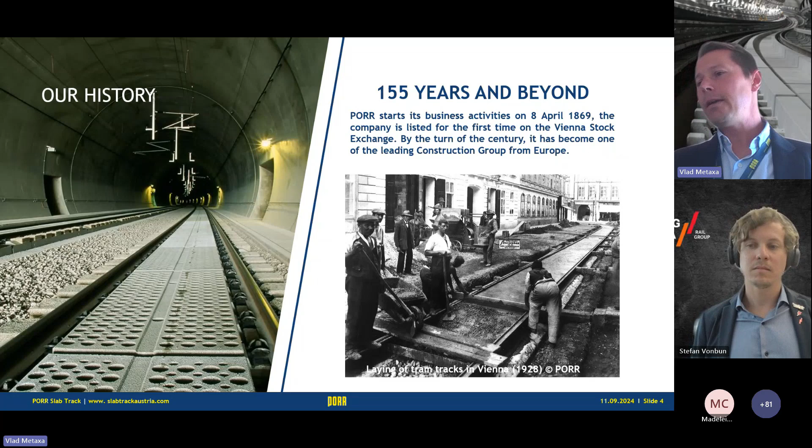So why are we talking about railway expertise at Porr? It represents one of the core competencies in Porr. We have extensive experience in execution on demanding domestic and international projects. We delivered, up to date, high-speed railway tracks, mixed traffic, freight, metros, and trams. So practically we covered all the different types of tracks. We have over 1,000 kilometers of slab track delivered and installed in Europe, Asia, and Australia with our technology.

Of course, we are trying to promote this, but sometimes other projects have different requirements, and therefore we try to go along with that. We did install railway on bridges, earthworks, and in tunnels. So practically we face all the different challenges that railway can give to the contractors, to the clients, to employers, and so on - all the stakeholders involved in this.

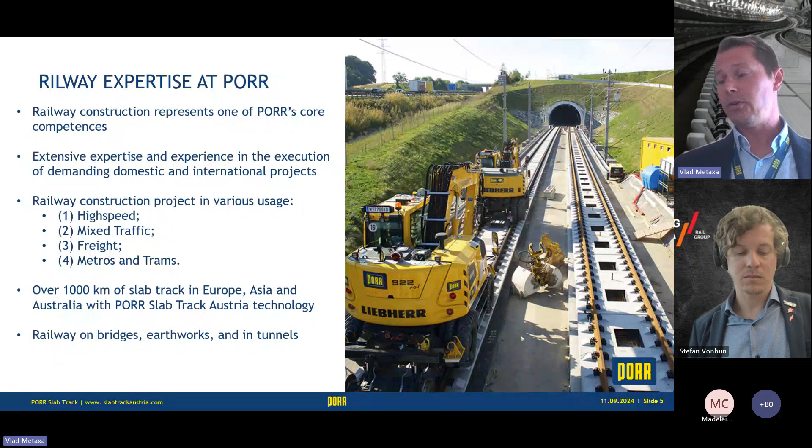As for type of railway tracks, I just want to touch briefly on this aspect. Because normally in ballasted track, the ballast substructure is an elastic environment. Practically it's taking a lot of the dynamics of the trains and dissipating it to the sub-base layers. And the fastening system is more or less not as much stressed under this type of loads. While in the ballastless track system, the structure has less elasticity, and therefore the fastening system is more, let's say, exposed. However, this along the years and along the technology development proved that the ballastless track systems are much more durable and much more reliable during operation times. So this is one of the most important aspects that needs to be mentioned here.

In terms of type of slab track, there are different systems on the market. So the specifications are always more or less done openly for all the different types of systems to be implemented. Here I will touch on the main categories that, of course, we are facing and installing. There are the compact systems, which are the monolith systems, cast in situ sleeper, which is the most, let's say, known - the Rheda 2000 system.

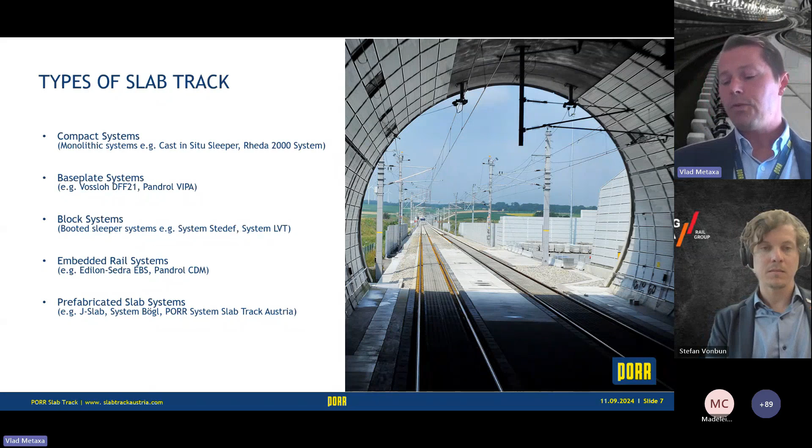I will focus now the discussion on when it's required or suitable to apply the slab track system. Usually, the projects that require mostly this type of track... of course, there are authorities and networks operating high-speed trains on ballasted track. I'm not saying it doesn't exist, but the slab track technology proved over the years that it's much more suitable for this kind of operation.

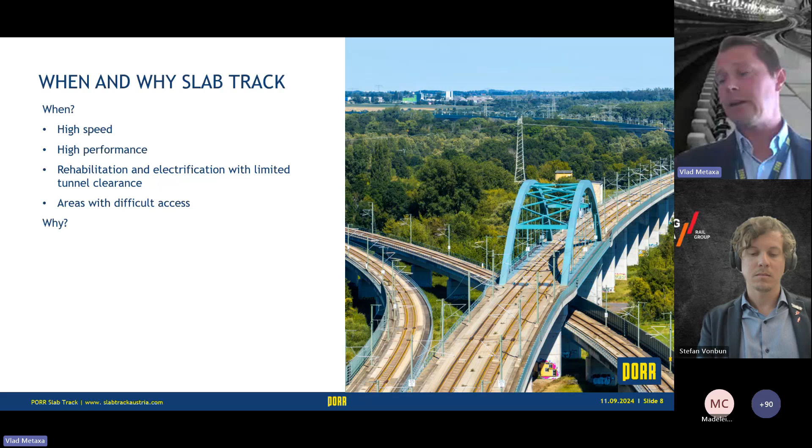Operational tracks for high speed, due to the high performance requirements and high accuracy required. We also faced projects where rehabilitation and electrification with limited tunnel clearance were required, and therefore slab track technology was the most suitable type of track to install in such areas. And of course, more and more we are facing projects with difficult access areas, so these slab track technologies are the most appropriate to be executed.

Why install slab track? Because the maintenance is reduced, so the requirements for maintenance don't affect the revenue times. Of course, different systems present different challenges, but certain systems have additional benefits: long life cycle, high availability of the track and revenue times, high track precision, which has secondary effects like reduction of noise and vibration emission of the track, and lower effects on the wheels of the trains, and so on.

And more, we face the requirements for trafficability with emergency equipment in areas with difficult access like bridges and tunnels. So this is a major advantage that slab track has compared especially with ballasted track.

Talking about projects and how we implemented this technology in current or delivered projects, one example is the high speed line in Germany, where we delivered the VDE 8 project for operational speed of 300 kilometers per hour.

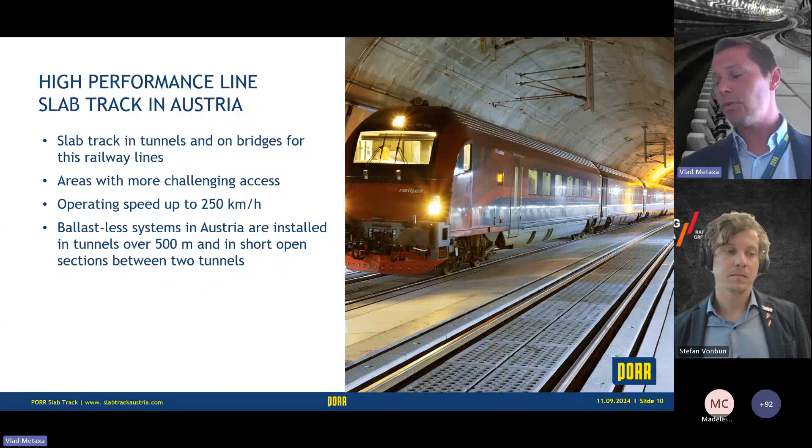So if you have two tunnels one beside the other, instead of doing transitions that add a weak point in the track, which can present maintenance requirements during operation, it's decided to go throughout with the ballastless system. Another example of a delivered project with a ballastless system is the King's Cross gasworks tunnel in London.

This tunnel was decommissioned in the 1970s, and it was identified as a possible way to add capacity to King's Cross. Therefore, the ballastless system chosen for this location was the Porr slab track system, which had integrated resilient material in order to also mitigate the noise and vibration emission from the track.

And by reducing the thickness of the track and the width, they could install two tracks and also the overhead line above. So this is another example of how slab track technology can cope in these difficult areas with difficult access.

Another example, and I like this cross-section to show the comparison between ballasted track on the left and slab track on the right, is the Arlberg tunnel. This is a practice in Austria because the structure gauge, by inserting the catenary line, had to be increased and the thickness of the track reduced.

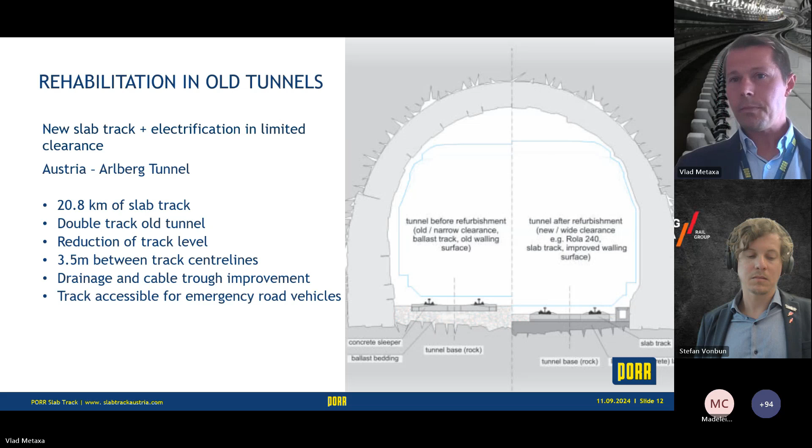Another project that we delivered was a greenfield project. This is another application, of course the ideal case. Metro Doha was one of the largest metro projects that we executed. Here we had 165 kilometers of underground, elevated, and at-grade track. And again, the technology of slab track proved that we could deliver such a large-scale project within 3 years, compared to a ballasted system, for example, where it would have been impossible to do that. So this was proving again that slab track technology is much more suitable for this kind of application.

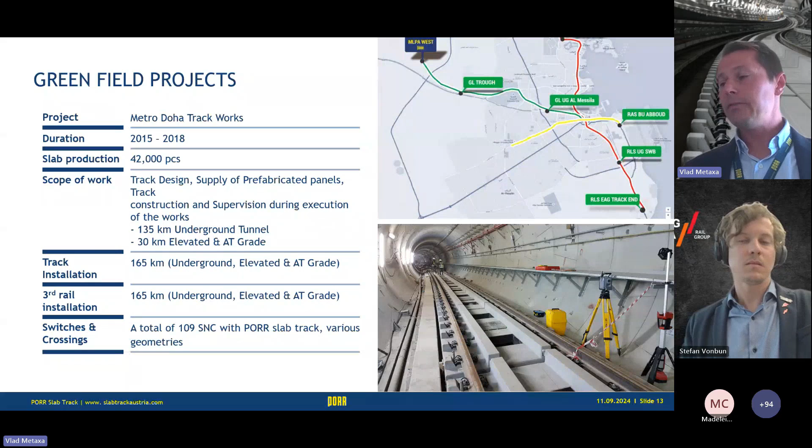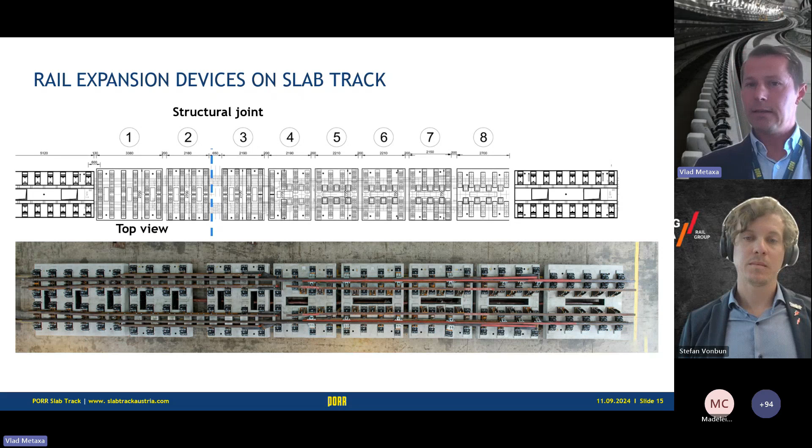What is important for this kind of areas is the accuracy, because working in ballastless track in concrete, the accuracy of the track is very high, and therefore the human error or installation errors on site are much reduced, and in this way you can obtain a good track quality. The same applies for rail expansion devices on slab track that are necessary for bridges, where we have expansion joints with large movements during temperature changes. With the experience we got along the projects delivered, we now definitely look always to go with ballastless solutions for these areas, since they are much more stable and present less headaches during operation and maintenance.

The design consideration for optimal approach, longevity and cost effectiveness - what we usually face is that the procurement schedule and the impact of design integration are faced by the contractors. Usually the design starts bottom up, or the procurement, which is normal - you need a structure underneath to be able to build a track. However, if you don't have the design of the track to be implemented, this can represent an interface issue during design and construction. So we always encourage the authorities and employers to consider engaging the track designer early in the process, in order to avoid all the interfacing issues that you can face during construction.

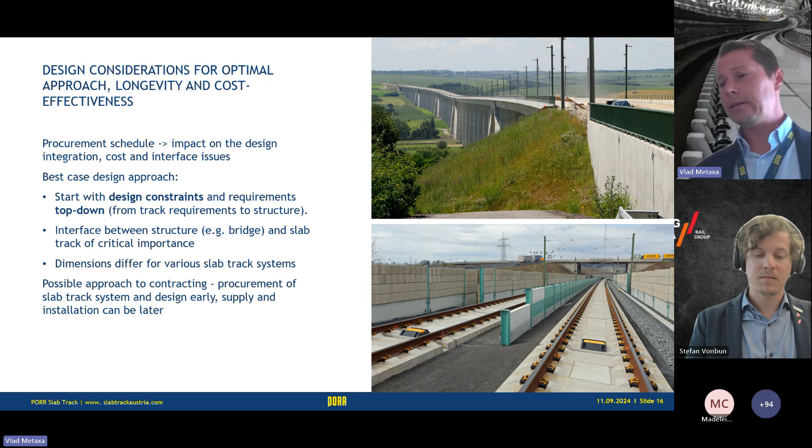What happens if you engage the designer? You will be able to have a cost-effective solution because you can optimize the bridges, you can optimize the tunnels, and so on. You will have a long life cycle if you consider properly the track-structure interaction, and you will have an optimized solution for the respective line. And of course, you mitigate all the project execution risks by doing this.

Of course, you can have a holistic approach if you do that, and you can reduce the dead load of the track formation. You have cost saving in the bridge structure design, and you can have reduced quantities for the track especially, that practically are just generating costs due to longer installation times and higher quantities that need to be installed. The advantages for tunnels are cost savings in the tunnel section, considering the reduced thickness of the track. So ballastless requires less space provision, and reduced concrete quantities.

This doesn't really impact the contractors, but what brings a benefit to the employers, the authorities, is that you can get more clearance in the tunnel for installation of all different types of equipment that are required to be installed.

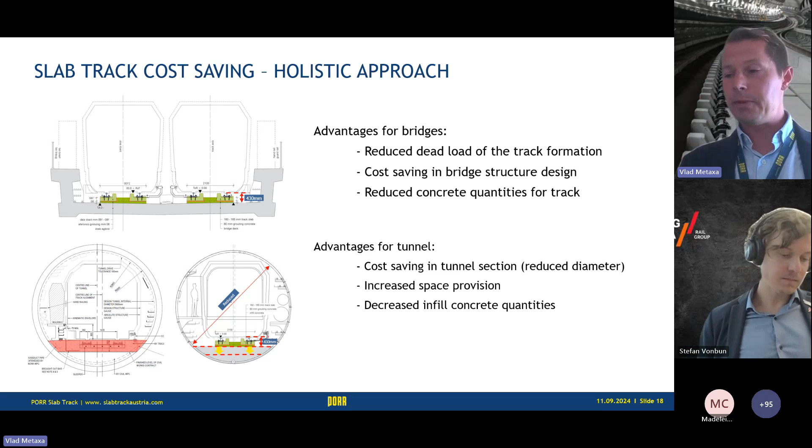The slab track operation and maintenance, along the years, has definitely proven to be much more reliable. The availability of the track is higher. The track precision over lifetime is maintained. So practically, having a concrete structure, you don't require so much maintenance activity to do, therefore the costs for maintenance are reduced, and the overall lifetime generates a reduced cost for the design life period.

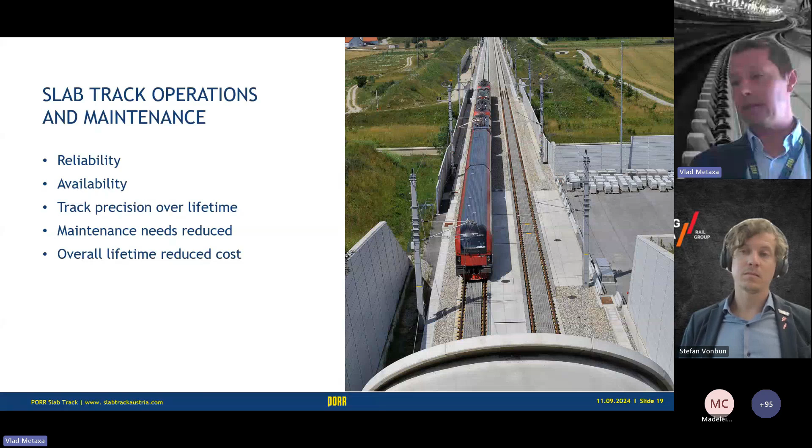Here we have a track alignment quality check - on the left side you have the ballasted track, and on the right side you have the slab track, and you can see the quality of the track is completely different. This is done after several years of operation, and the readings are, for the ballasted track, preventative - they will need to do some tamping activities in order to realign the track. However, for the slab track it's not required, and operation can continue as is. Of course, visual inspections and now videos or other technologies are required just to be sure that everything is fine.

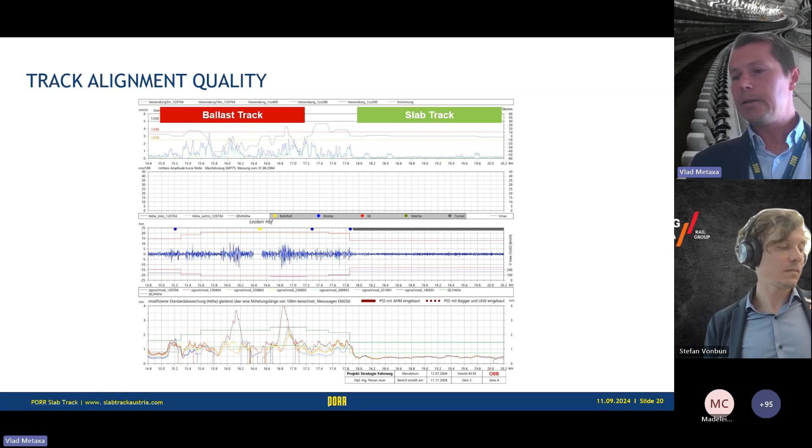But in principle, there should not be any risk on that. The cost between ballast and ballastless, we did several assumptions and exercises for different clients. The break-even is usually somewhere between 15 to 20 years between the investment cost of the ballast and the investment cost of the ballastless. And of course, depending on the type of ballastless system, you then have additional advantages, but I will not go into that detail at the moment.

However, what I want to say is it's always difficult to beat the ballast price per linear meter during construction. However, if somebody is looking at long-term investment, definitely the ballastless system will always be much more reliable and much cheaper compared to a ballasted system. Not talking about environmental impacts nowadays and the heavy equipment required to maintain the ballast track.

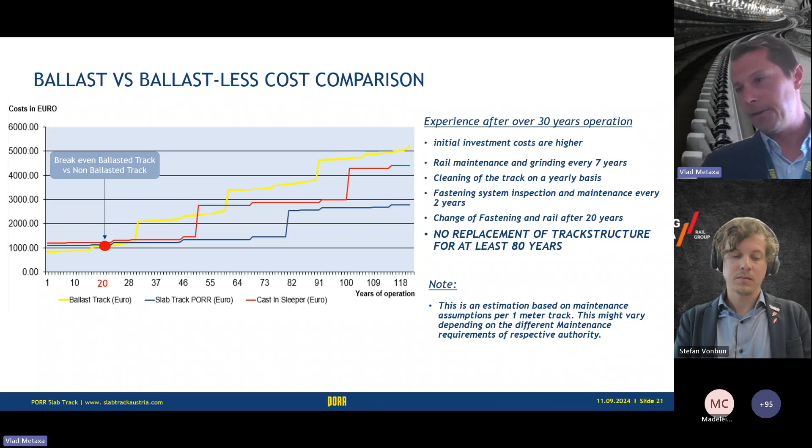As a summary of the slab track, it's a long-lasting, effective investment. For clients, I think this should be a prime consideration in their assumptions. For large networks, the track is more or less a system-wide solution. So therefore, I think it should be good for the authority to always consider the track as a whole package, a standalone package, with the engagement of design happening earlier together with the civil contractors in order to save and have lower life cycle costs. And of course, overall, high availability of the track with no impact on revenue hours.

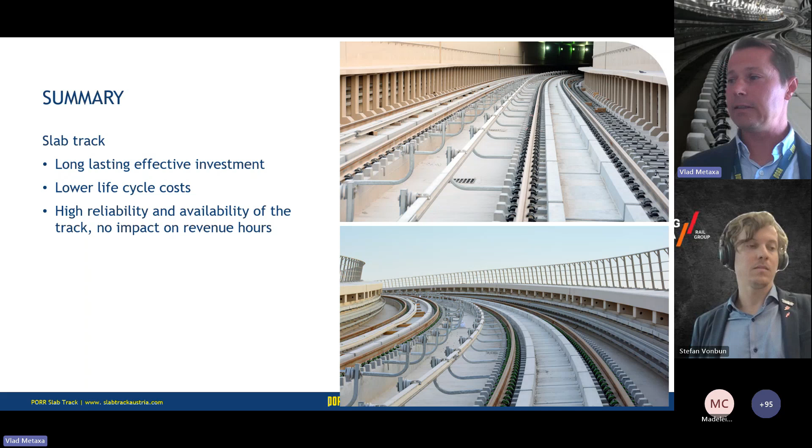This is, I think, a clear message that the slab track generally provides to the authorities and to the operators. So thank you very much.

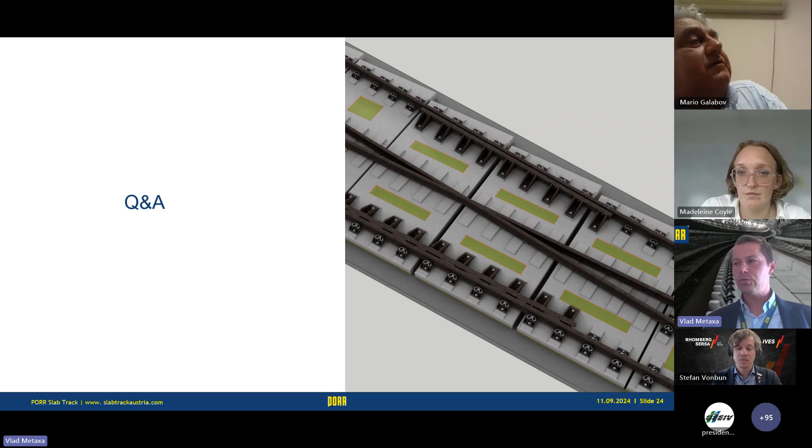Thank you. Yes, so to address transitions, in order to design a proper transition, you need to properly consider the operational speed of the train, the operational load, and especially I think also an important aspect is the fatigue at the transition. What we usually do is have the transition starting on the ballastless track, and then within the ballasted track, we'll have sleepers with different fastening systems of different thickness in order to have a smooth transition.

We also depend on the type of structure, because sometimes we have not only the difference in track type, but also different types of structures which add additional challenges to the transitions. In that case, you might need some extra rail or extra provisions for rigidity of the track between the two. However, as I said, in Austria, for example, the clear consideration for two tunnels in proximity is to go through ballastless track, otherwise you will have transitions. So we can treat that, and it is possible to have a solution that requires less maintenance, or doesn't require too much maintenance. Of course, for the ballasted area you need something, but for the slab track, it's not really required.

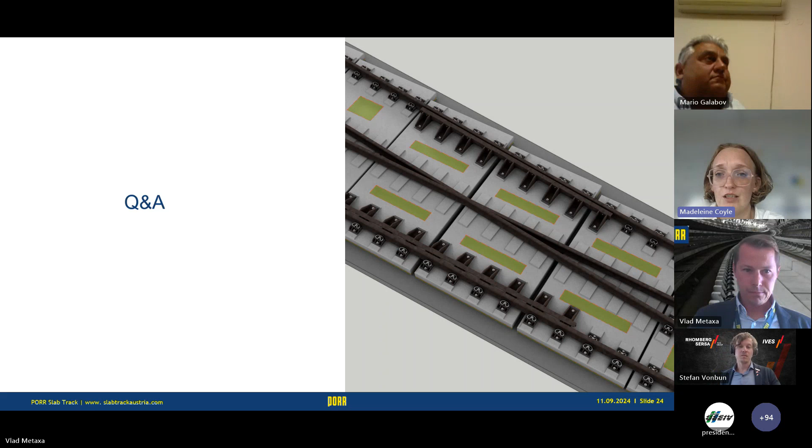Next question is whether any special aspects are covered in the design for a transition zone, which is tunnel approach as well as bridge approach, or bridge starting from tunnel approach. I think you may have just covered that in talking about the transition. Just to add on for bridges, we will definitely need to look at the structure behavior and study the track-structure interaction. So it's a little bit more complex, but it's doable. It's not a problem to do that.

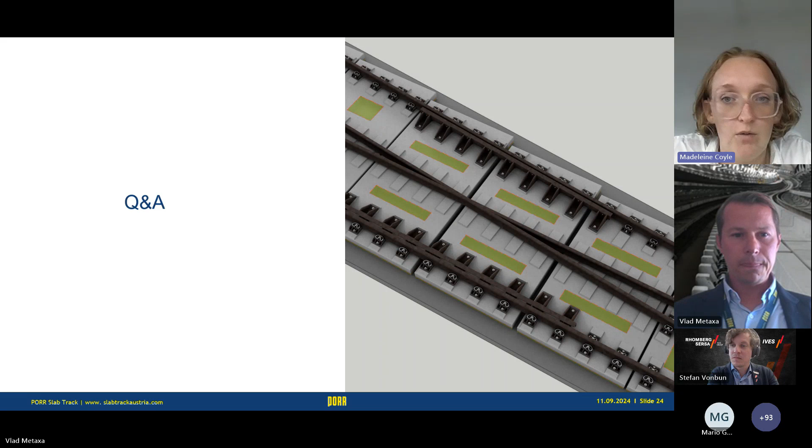Next one from Abigail Cahen: in the high-speed Germany case study photo, what is the function of the ballast next to the ballastless system? Not on the adjacent track, but alongside the concrete, is the question. Sorry, in the presentation, the picture I have.

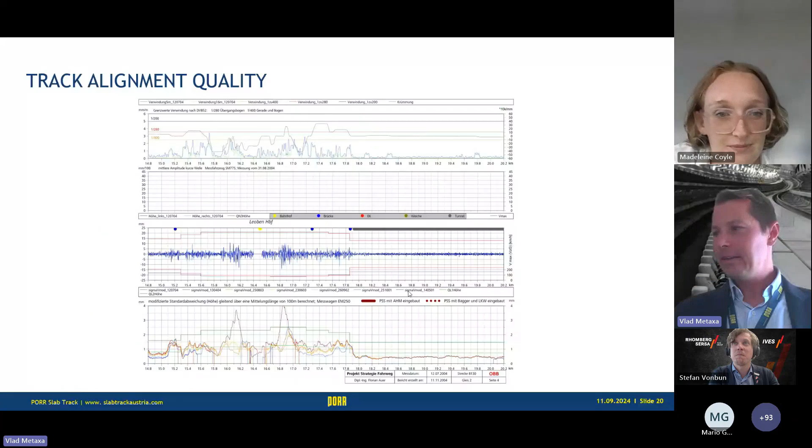Yeah, maybe it's worth bringing it up again. Okay, I'll put it back. The reason is that in this particular case, as you can see, the main line is ballastless track, but on the pocket tracks it's not needed. Usually you put maintenance equipment along the way, or there are safety requirements for such track, which is not practically operated full time. They are operated only in limited time, and besides this, they are operated with reduced speed - not 300 kilometers per hour. Therefore, the cost for such tracks to be ballastless is not really needed, because they can easily serve properly being ballasted tracks. So that's the choice of the authority in this case.

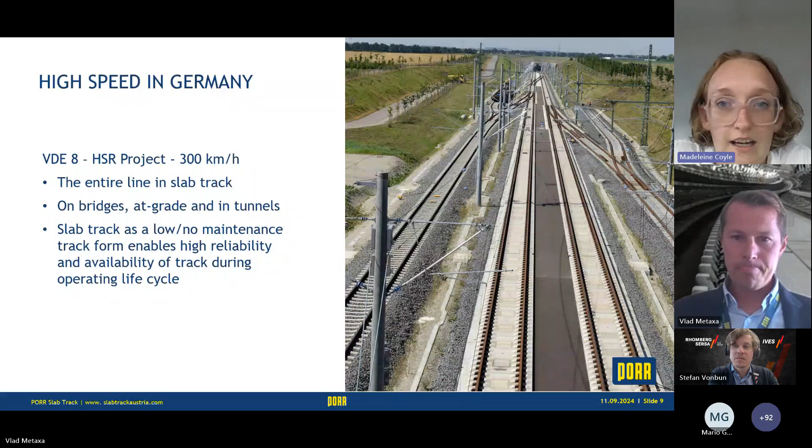I was specifically wondering, not on the adjacent track, but along that center track, there's still ballast along the sides of the track, and I'm wondering what the function of that is, or if it's just left over from before. It's in the area where we have freeze-thaw cycles, so this is set up as a freezing protection layer.

Abigail, does that answer your question? Oh yes, thank you. Cool, thank you.

Okay, are you good for more questions, Vlad? Sure, lots coming in. I don't know, Stefan, how good he is, but for me it's okay. Yeah Stefan, feel free to come in. It's okay, let's see - once the numbers start to drop in the participants, then we maybe should stop. No, it's fine, usually we have the other problem that nobody's asking. So yeah, this is great.

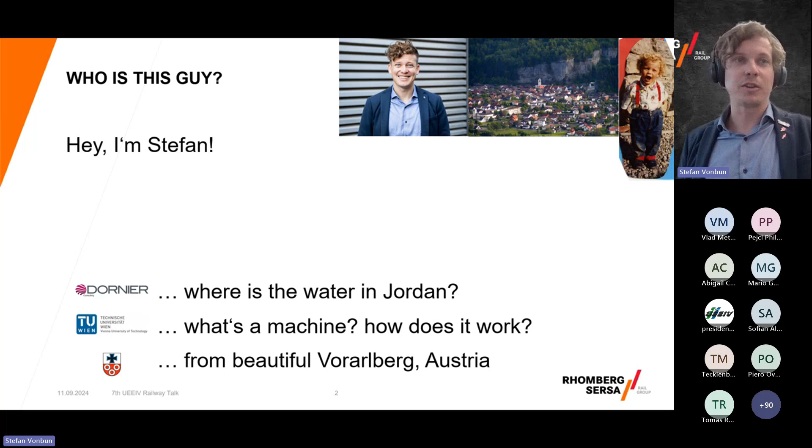So very quickly, I'm going to introduce myself. Who is this guy standing in front of you? I'm Stefan, from Western Austria. It's really beautiful here, we are located in the mountains. I have a technical background, I once learned how machines work. Then I was looking for water in the beautiful country of Jordan. For a while I stopped railway vibrations and developed some new business areas. And now I'm going full steam ahead with our slab track system IVES and our transition module VTRAS. So next year I will celebrate my 10-year anniversary in the railway infrastructure business.

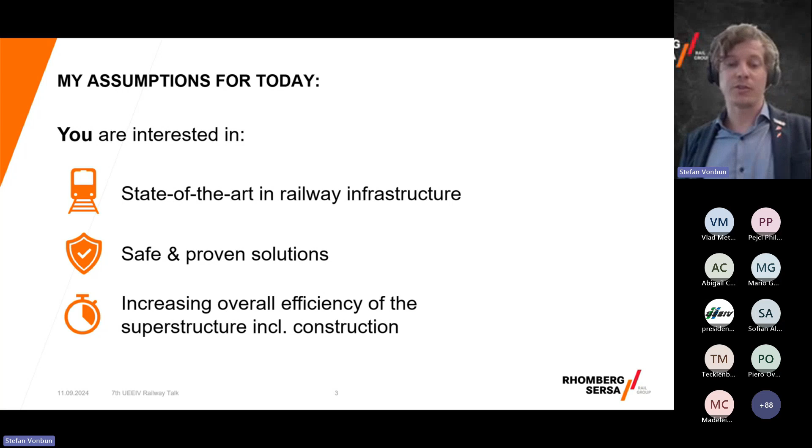Let's go ahead. I have a few assumptions why you people - we are now more than 100 participants - why you are here, what your interests are. I assume you are interested in state-of-the-art railway infrastructure, you are looking for safe and proven solutions, and you want to increase the overall efficiency of your superstructure, including the construction of the superstructure. Since I cannot see you nod, I'll just assume I have 3 positives here, and we can move on.

I'm here to give you a quick overview of what we do at Rhomberg Sersa, also to connect with people, so you know who to call in case you have issues that might be something we can solve for you. And of course, I think this is a really crucial part, and we just saw that - I'm here for exchanging knowledge and receiving some feedback.

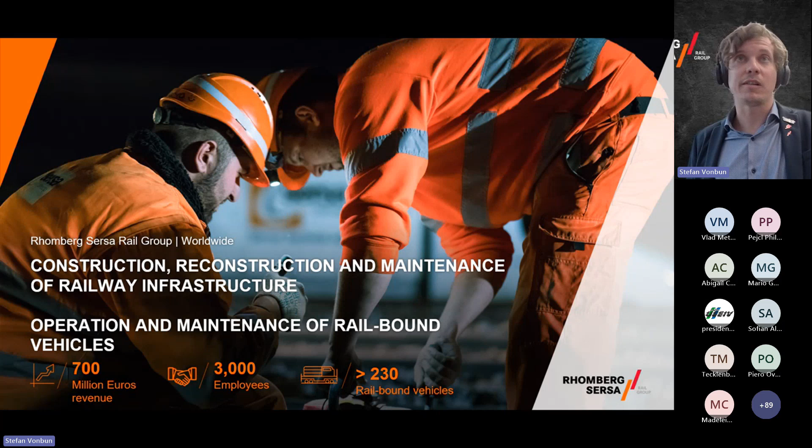So, 2 brief slides about Rhomberg Sersa. We are actually a Swiss/Austrian company. We have around 3,000 employees worldwide, and we work in construction, reconstruction, and maintenance of railway infrastructure. With some of the questions asked during the previous talk, we already have a lot of experience because we not only build our own system, we have built almost any slab track system that you can find.

Okay, now let's go for the actual topic of today. I'm going to talk about IVES, our slab track system, and how it can help to build faster and have some upgrade of tracks in short possessions.

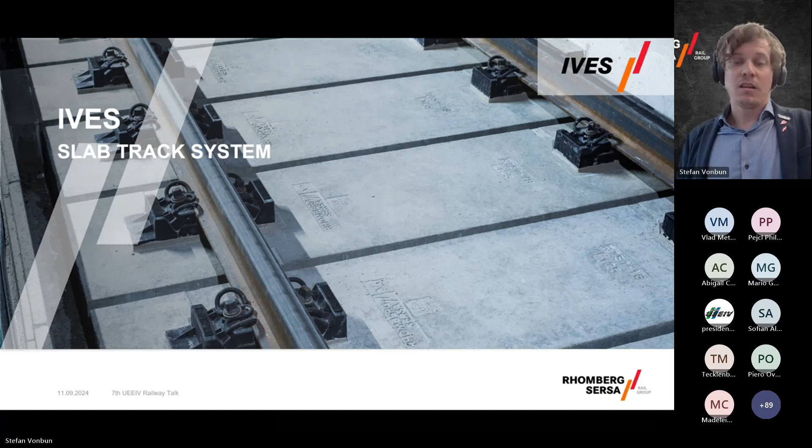The railway infrastructure is developing, and the challenges are changing. So is Rhomberg Sersa, and that's why we developed our very own system. Vlad already mentioned quite a few different systems - all of them have advantages and disadvantages, and there is no one-fits-all solution. But still, we thought we could bring something to the table by eliminating some flaws of existing systems, or combining positive aspects of existing systems and adding some new stuff to it. Still, there is no one-fits-all solution, so this is yet another solution, and I'm going to show you how it works.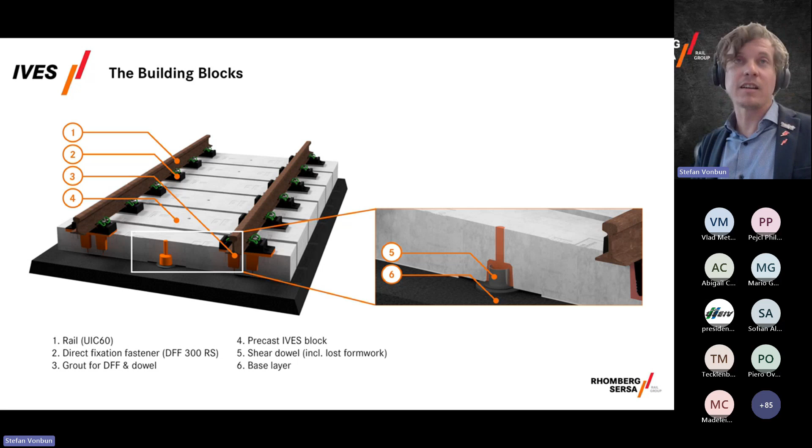One colleague once put it very nicely, and this inspired us. Hermann Granig, a foreman who has been working for 40 years in the railway business, said it's as easy as constructing with Lego to build this system. So I couldn't resist, I had to build it with Lego. This is also very helpful to explain it not only to children, but also to engineers, because it's very hands-on.

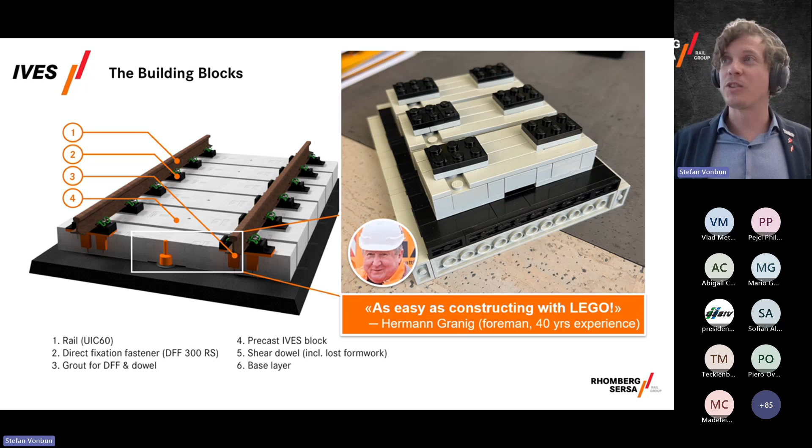My presentation looked very different just up until 1.5 hours ago. But a young colleague of mine, Daniel, was working on an animation of a construction sequence simulation involving our system. I told him that if he could finish it in time, I would change my presentation, remove most of the pictures, and use his animation instead. Just 1.5 hours ago he finished it and handed it over to me. So now I'll explain the next steps via this animation, and you are witnessing the world premiere of this simulation.

One word about simulating construction sequences. At Rhomberg Sersa, we've found that meticulous planning is really important with ever shorter track possessions. So we are heavily invested, both with resources and time, to be at the forefront of simulation before constructing. We look at 4D simulations that don't only include physical objects moving around, but also the data behind, like how many meters per hour you can build with this or that system, how fast an excavator moves, how fast a truck moves. We combine this and check it against the actual geometry, for example of a tunnel, to see if things can actually be brought in. This way we really avoid a lot of the problems that can occur on the construction site, and that's the idea behind these simulations.

I'm just going to let it run. This simulation will show the construction steps of our IVES system. Like any model of reality, it's not reality - it looks a bit more like a computer game. The idea is it helps explain things. We have some data behind it, like I said, and that helps us estimate construction times. So let's dive into it.

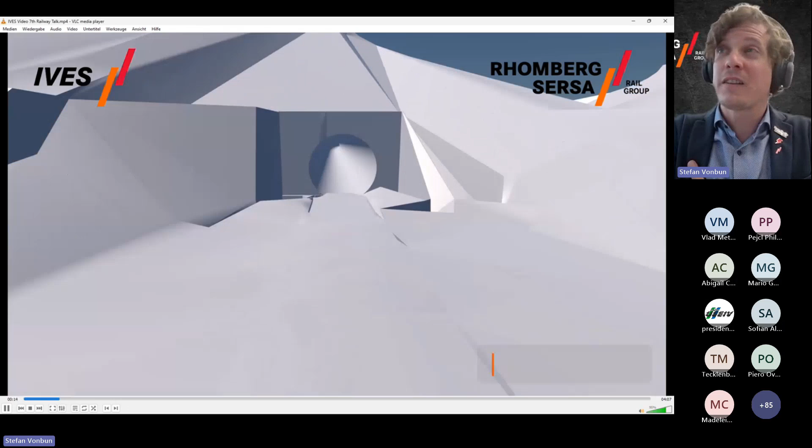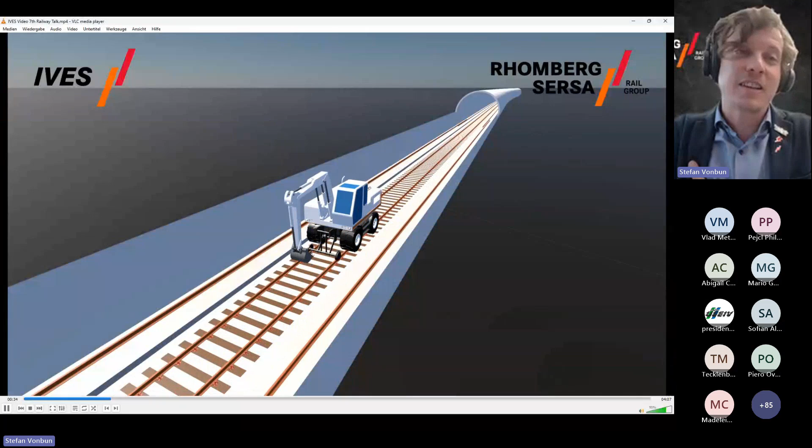You should now see a train going into a tunnel. This tunnel shall be refurbished from ballasted track to slab track. So the track will be closed for maintenance or construction. The rails are first put in - these are the new rails that will be used later. Why do we do that now? Because we can now operate on the existing rails, and this is always faster than using a truck or something later.

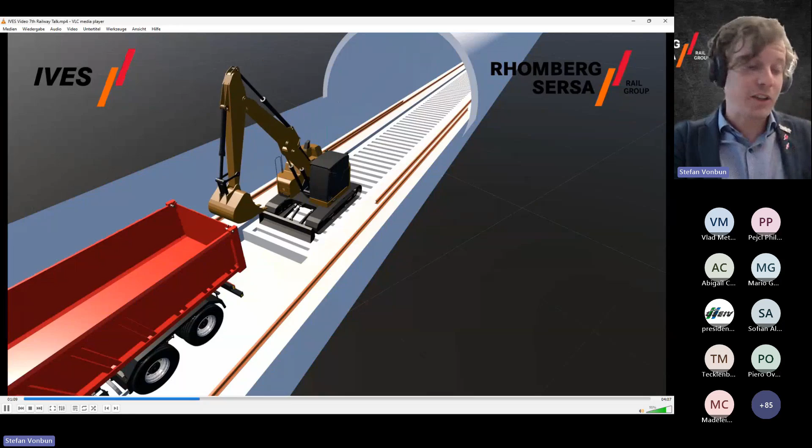Then the existing track is cut into panels, and our Kirow train comes in and removes the track panels. This is relatively efficient, 18 meters with each move. Then we start removing the ballast. You can just imagine, this isn't shown, but the ballast is removed and put into the truck. Behind the simulation, we're showing only excerpts, but we are of course calculating how many times the truck has to go in and out.

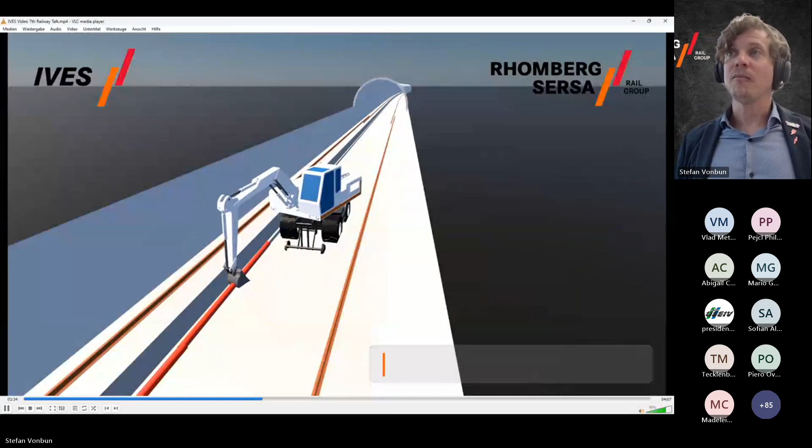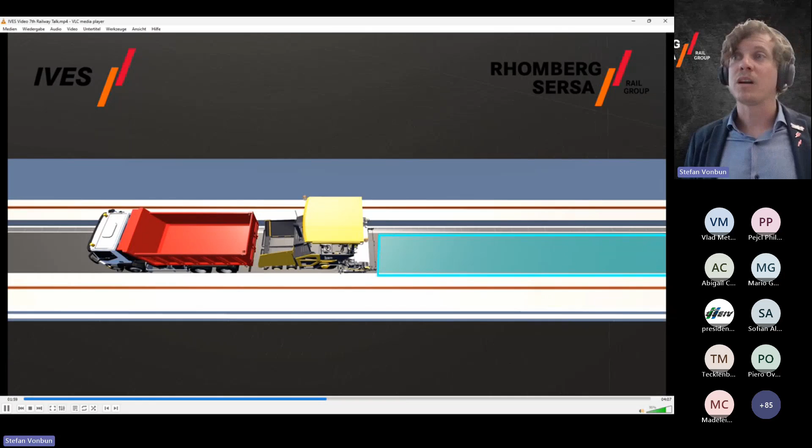Then the tunnel floor is lowered a little bit, or let's say we make a smooth and even surface. We also clean it, and mill the drainage channel because there will be water and we don't want that in there. We install a drainage pipe, and then we're already going for pavement. With our system we usually work with asphalt for several reasons - one is that asphalt is quite fast curing. So only after a few hours, depending on the temperature, you can actually drive over it again, and it's load bearing very quickly. So this is a nice way of having a base layer very quickly.

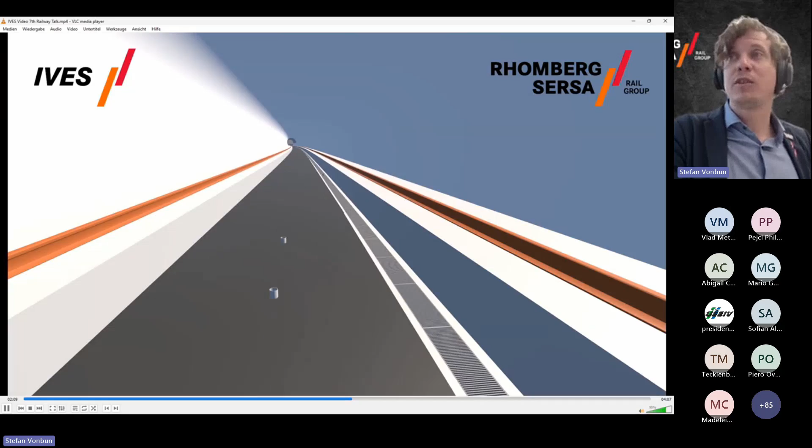We install the dowels. Usually inside a tunnel, they are installed every third element, so every 1.95 meters. Then we are already installing the blocks. In this case this is shown here with an excavator, and I will show you in a bit how it can also be done - there are different ways of doing this.

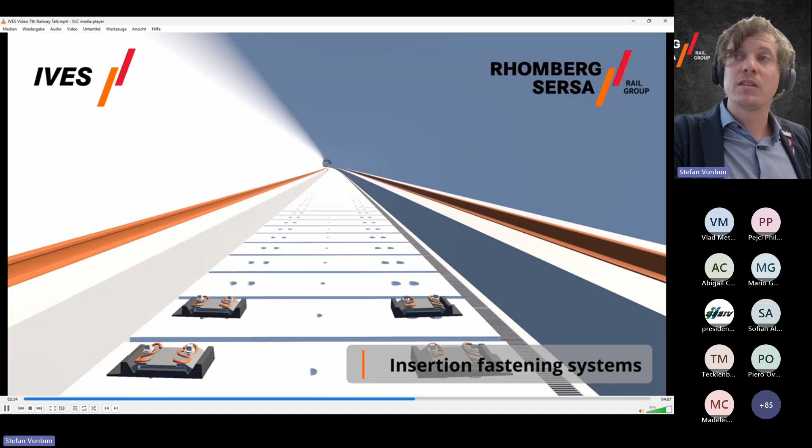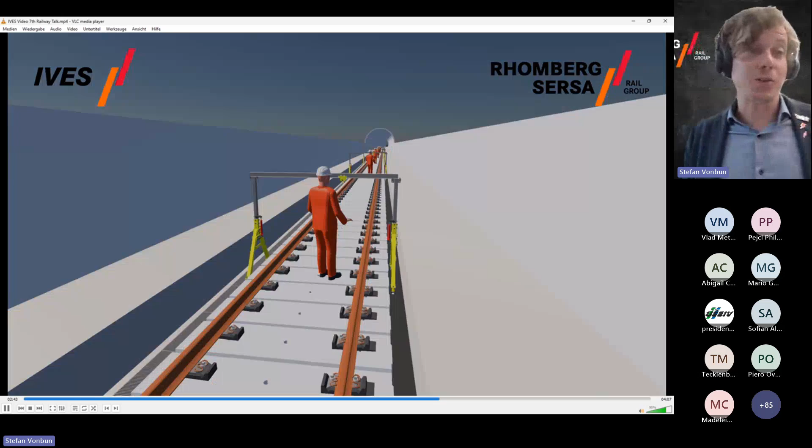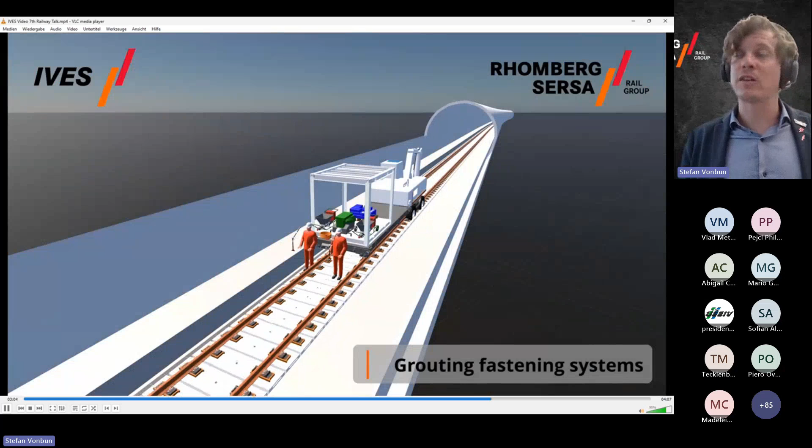The fastening systems are then installed. It's a direct fastening system, so it's not finished yet. We have to install the rails and manufacture the actual track panel that we can move. The track is being aligned very precisely. Formwork is installed, and then we pour the fast setting grout into the slots in the fastening system.

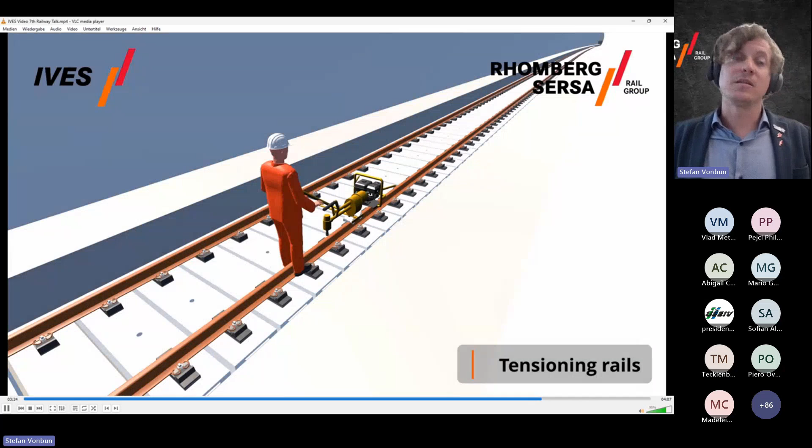Track geometry is enabled and ensured by surveyors going through, checking everything. Then in the end we tension the rails and weld them together. Last but not least, the track closure is lifted, the train comes through, and the track is back in operation. Now there will be a few facts about this project.

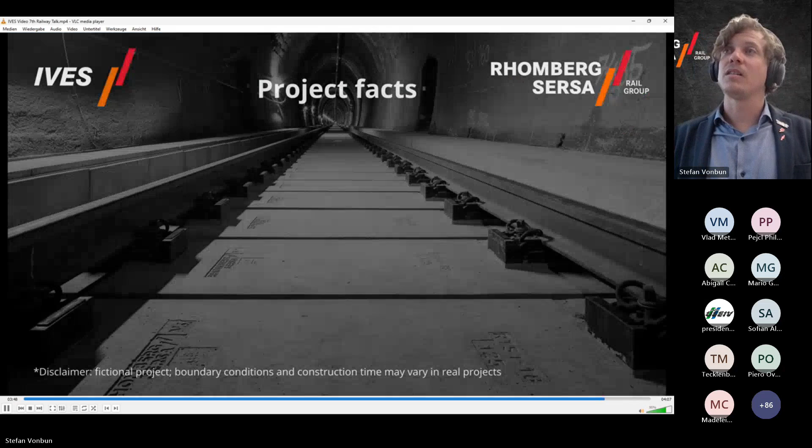It's a fictitious project, there's a little disclaimer at the bottom. It's a fictional project, but we took all the data from actual construction sites. So, 450 meters of tunnel, refurbishment from ballasted to slab track. The dismantling of the ballasted track, as we simulated here, would take 6 days, and the installation of our slab track for the whole tunnel would take 14 days. So 20 days of work. And of course the boundary conditions and construction time in real projects will always be different.

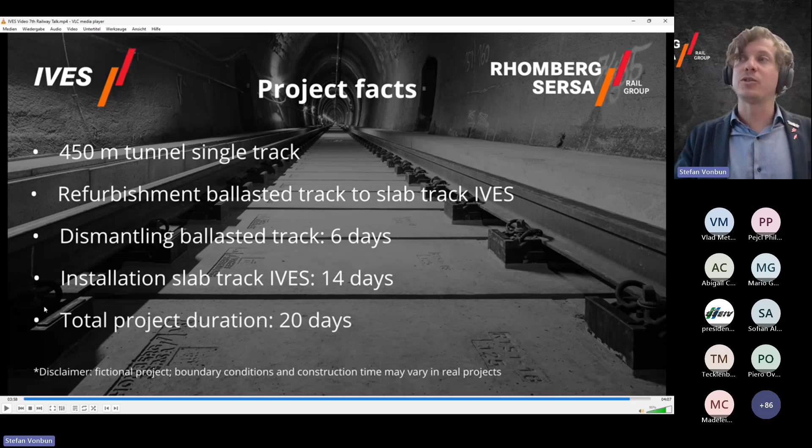Nevertheless, we have a simulation system that can help us come closer to reality. If we get some data, we can look into it and check if this makes sense to do, for example, with this system. IVES was developed for fast construction during ever shorter track possessions.

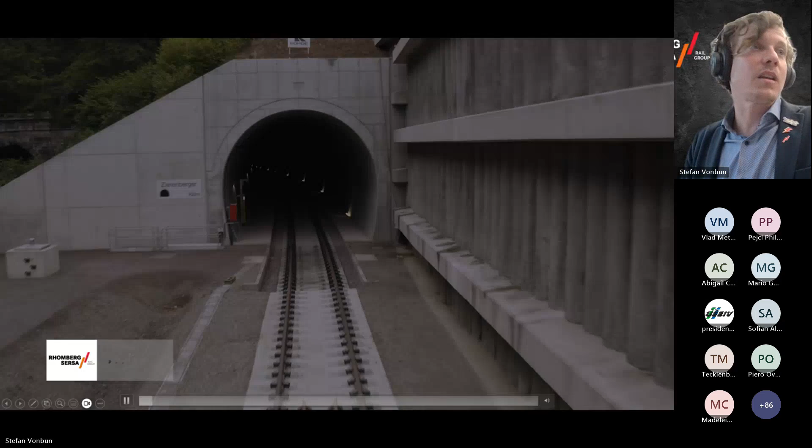This was the simulation, but there's also reality, because if I only show simulated pictures or videos, you guys will be wondering if anybody ever built this system. And yes, we did that. And this is... one second, I have to remove the sound because my ears are exploding almost.

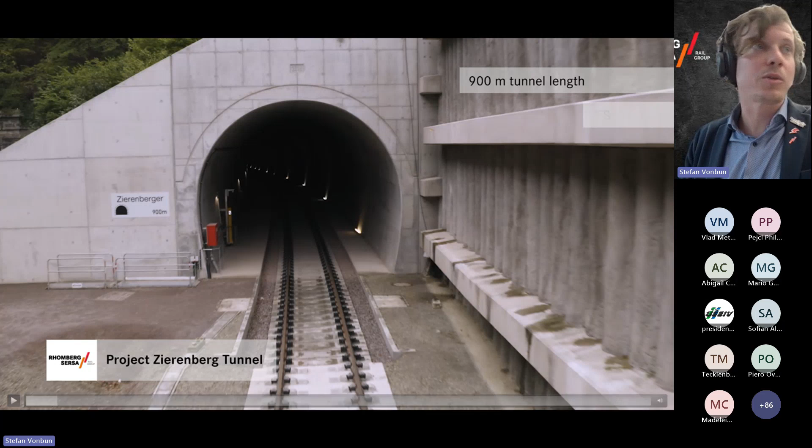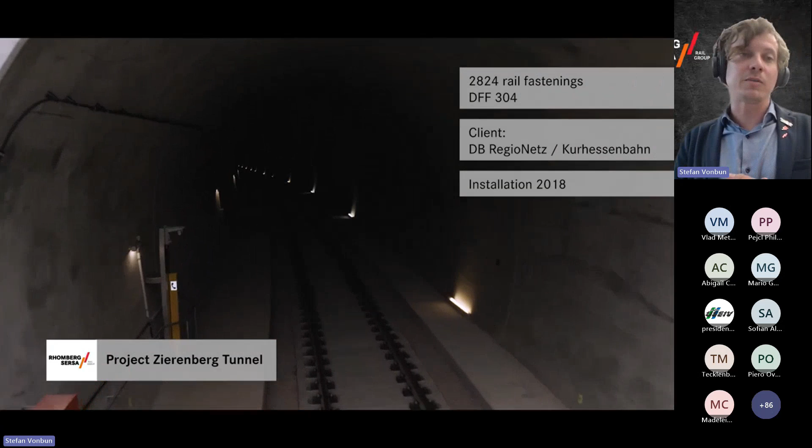So this was the project that we did in Germany for doing the operational testing for the network of German railways, Zierenberg Tunnel, somewhere in the middle of Germany, I would say. Here you can see the actual track, how it was constructed. This is already the final pictures, we did a video when everything was finished.

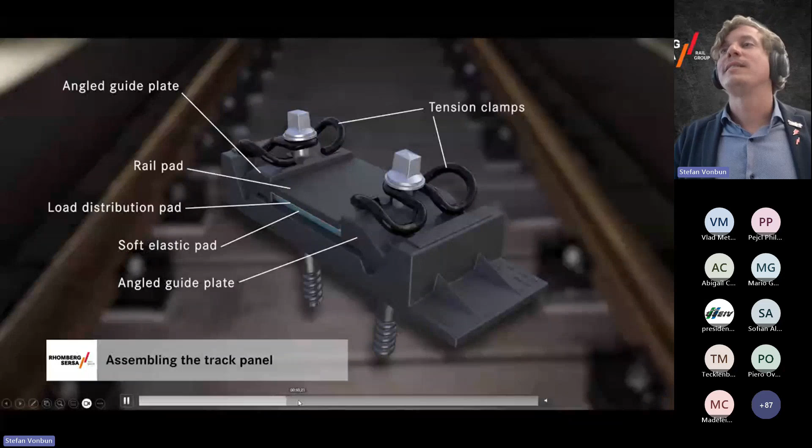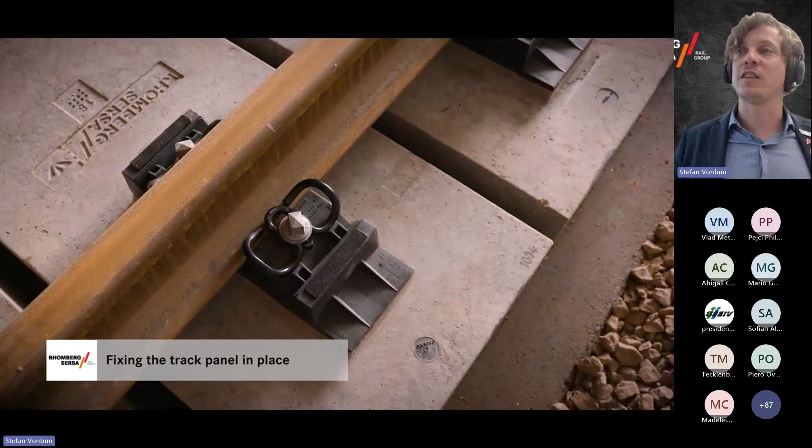We can jump a little bit to the front. We can see some of the steps that we didn't show in the other animation, for example the surveying and adjusting that of course have to take place. Also the grouting process, this was not shown before, but this is how it's done. Now you can imagine it a little better, because now we have a cross section. The grout fills the whole base plate, and then the system is stable and in place.

And that's that in terms of moving pictures.

So, a few more words about what makes construction with IVES fast. One thing is fast setting asphalt. Then we have the high level of prefabrication. We have very fast curing, either cementitious or epoxy grout - epoxy is of course a lot faster. And there is a high level of automation possible for big projects.

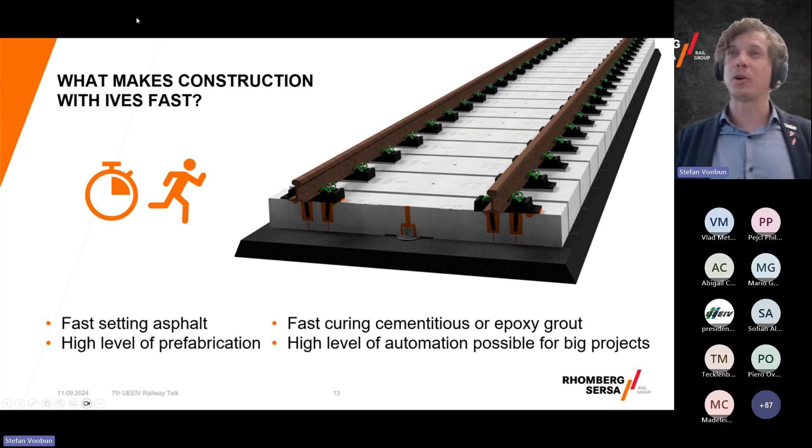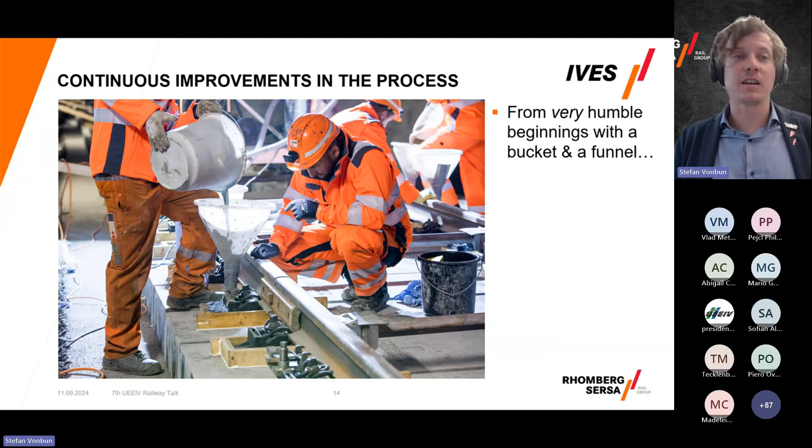And I want to dive a little bit more into that. So we are continuously improving in everything we do, and of course also our construction process. This was the very humble beginnings of first IVES construction, was grouting with a bucket and a funnel. Things had to be done, and we found a way. This is not really state of the art nowadays.

So nowadays there is a half automatic mixing and grouting unit. It's a mobile unit that can be put to any construction site, and this works way better. It's a controlled process, and it's also a lot more fun to work with. And for bigger projects, higher automation is possible.

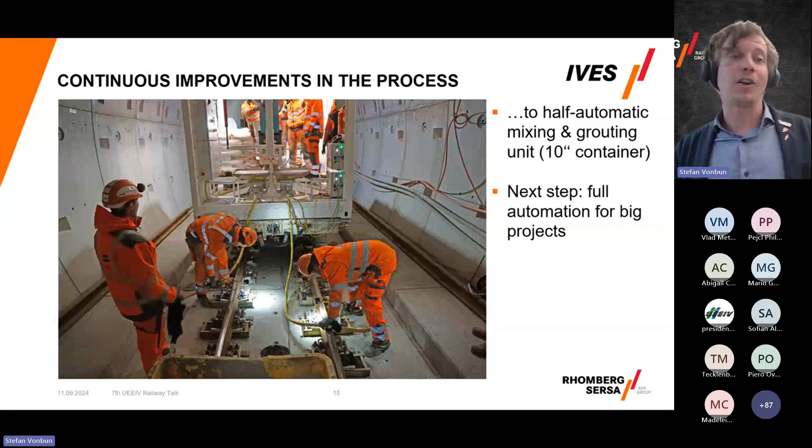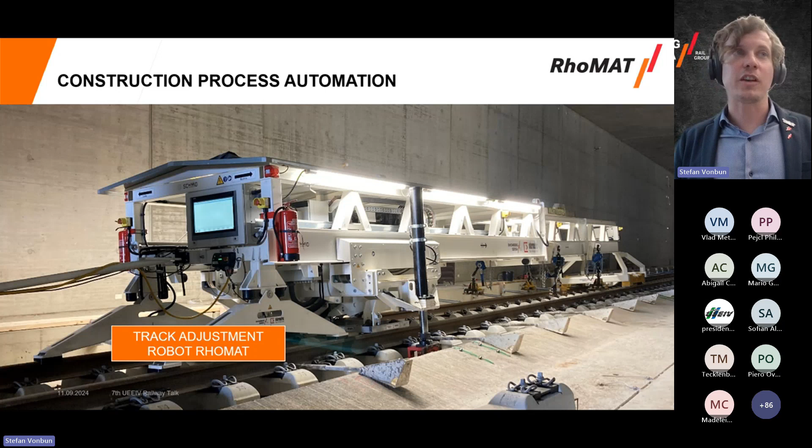Also, very interesting, the track adjustment process currently is quite manual. This was a bit too slow for us, so we recently developed this track adjustment robot. It's called RhoMAT, and what it does is best explained in this short video here.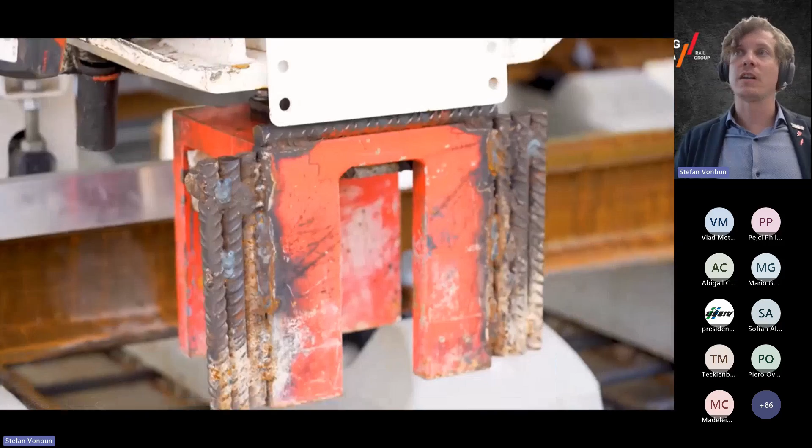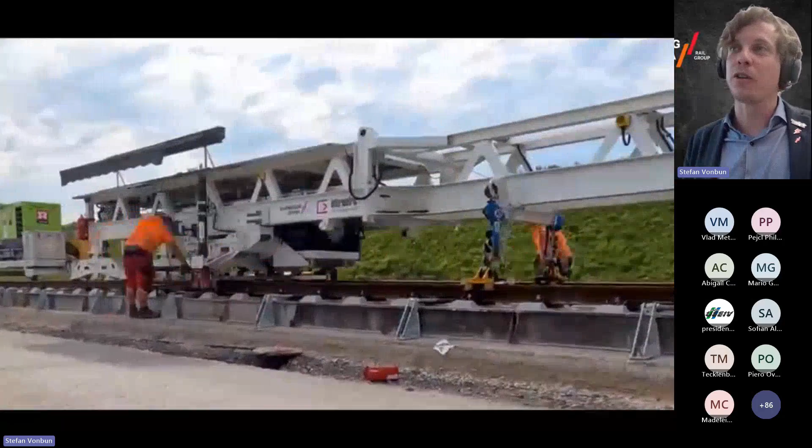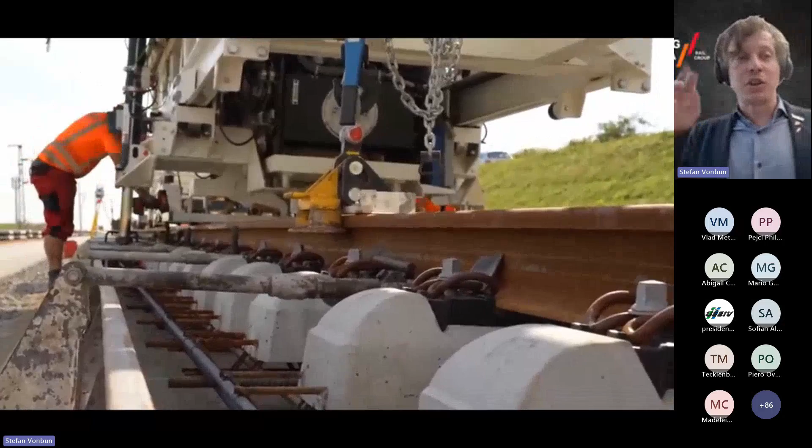This is a video from a construction site in Germany where we were responsible for track construction. This is the radar system, also mentioned in Vlad's presentation. Here you can see it works a bit like a tamping machine, with a satellite that goes back and forth, and this adjusts the track very nicely. The operators only have to put the alignment systems, which are supports underneath, and fix them. This is already so precise that it's almost the final adjustment.

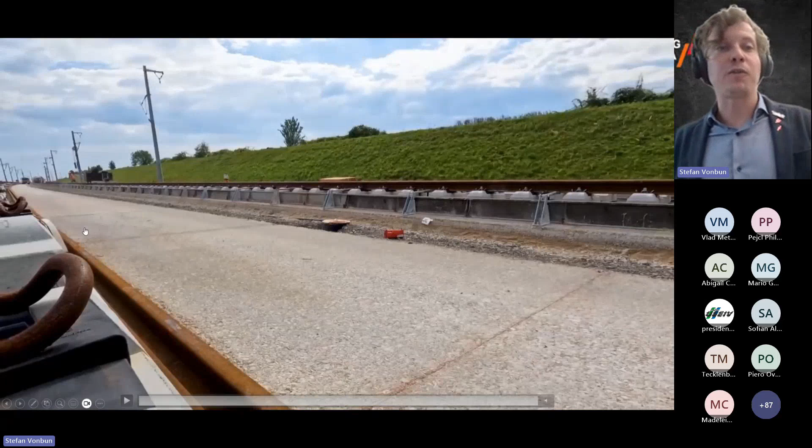After this, the surveyor comes, and the cool thing is we are collecting data with this, so the surveyor doesn't start from zero. He will know before going there which area is further away from the perfect track alignment than the other one.

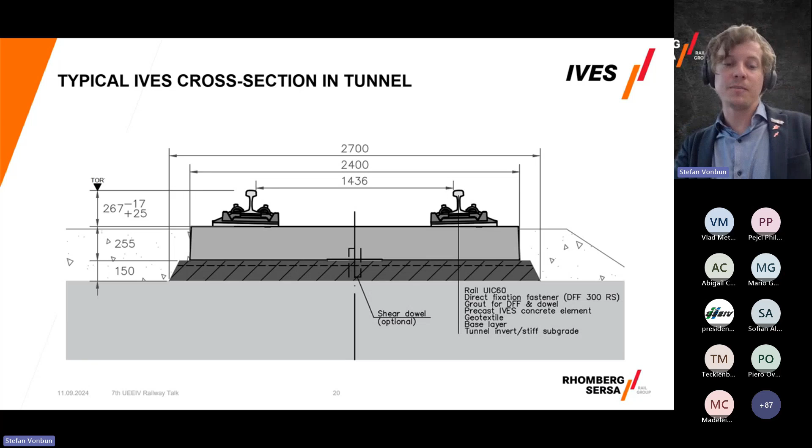Okay, few more slides, almost done. We are also working on making our own system more efficient, not just by using machines, but also by reducing the use of material, lowering even the construction height to give more clearance. One of the things is to lower the asphalt layer, reduced from 150 millimeters to 80 millimeters. In order to do that, you have to make sure the lateral track resistance is still okay.

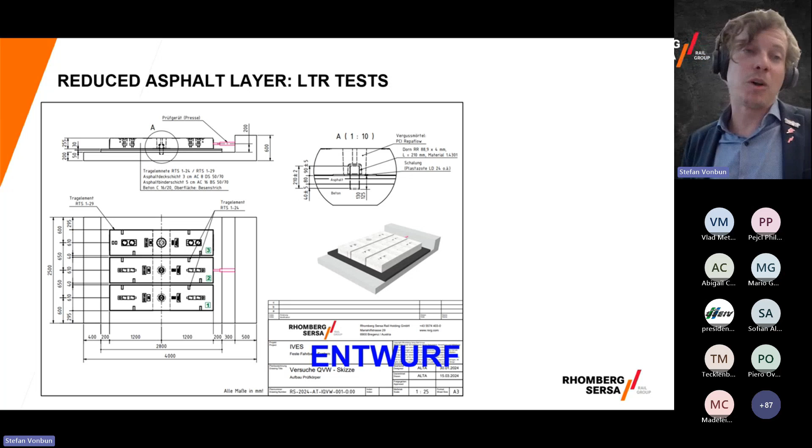Lateral track resistance is given by this type of dowel, like a 210 millimeter steel pipe. Looks like this. Whether or not this steel pipe holds our track well in place was a question we were asked, so we did some testing. It looked like this. The Technical University of Munich assisted here with great efforts. I don't have the official test report yet, but I was there, and we passed it with very high values. So we are happy about it, and we can reduce the asphalt layer without any problem.

There was a question about heavy haul and slab track. IVES has been in track in Branxton, in the network of ARTC in Australia since 2017. It's a track with 30 tons axle load, 120 MGT per year, so it amounts to around 800 million gross tons up until now. Taking the equivalent yearly tonnage, it compares to 40 years in a European track, and the system is great. The client is still happy, so it works, and it's a safe thing to use, also in heavy haul.

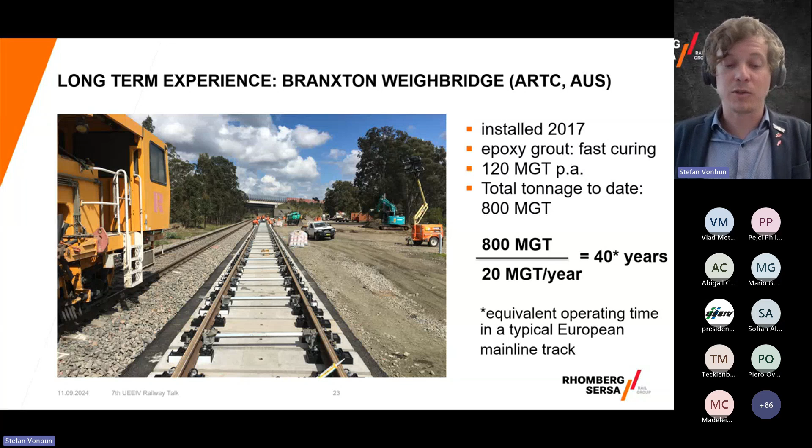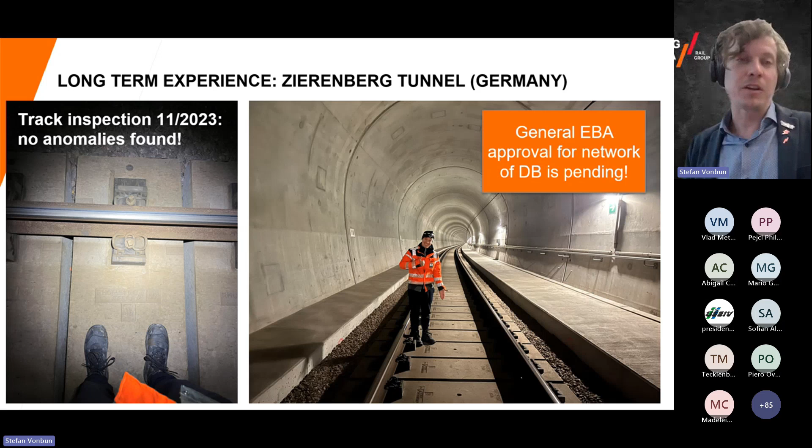This makes IVES also one of the newer systems, even though it has been installed since 2017, because in railway terms, 7 to 8 years is a very short time.

Okay, last but not least, what's the added value of IVES as a slab track system? We can ensure short track possessions, so high track availability. There's safety through proven long-term performance, as shown by these examples. We have very high precision through prefabrication and our innovative fastening and process. And it's easy to replace and dismantle, which is also important because at some point these systems have to be dismantled. Not every system is the same. So yeah, that's it from my side.

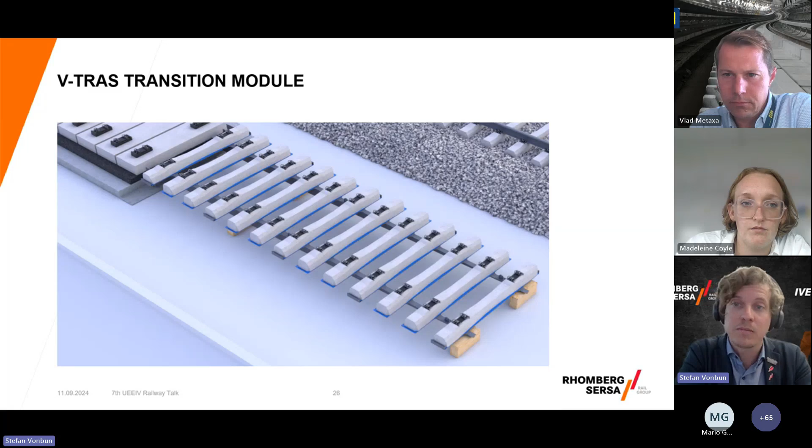Okay, thank you both for that. I think this is a good place to end. I feel this has answered a lot of the questions that were put into the chat. But if you want to put your details so people can ask you them individually, or if anyone here is going to InnoTrans, you can ask these two in person. I just want to say thank you again, both of you. Yes, brilliant, thanks Stefan, and thank you to everyone that attended.